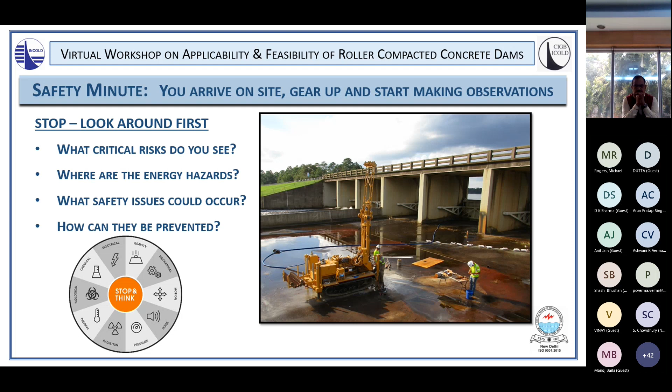So some of the quick things here are, we have a mobile equipment device here. And so it could have some energy moving back and forth, up and down. There's some gravity energy here on dropped objects from the boom that's above. There's some stored energy here, the water behind the radial gate. The heat is an energy source. Heat being out in the field, also ultraviolet radiation.

There's a lot of water here, and so slips, trips, and falls are very common in these areas, so be very careful. Just being outdoors, there are bites and stings that can happen, so we want to be careful with that. You can see posture here, bending over. So we want to be careful with that to not hurt our bodies. And then also the water hazards generally around the site here. So that's just a quick safety moment. And when we take a minute to be safe, then everyone goes home safe.

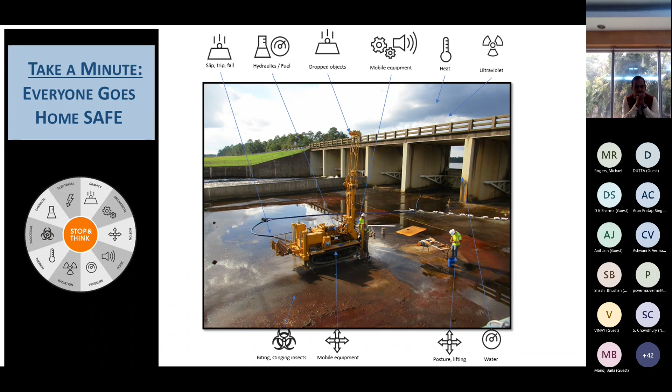So let's begin with roller compacted concrete and using RCC in dam construction. This presentation today will be part of ICOLD Bulletin 177, which I was part author of, and that includes other uses of RCC, stuff that may just be a little bit out of the ordinary. And so I'm going to talk about these topics today, from overtopping all the way through raising of concrete dams. These are primarily rehabilitation aspects of dams, but they can be used for new dams. And then I will present some case histories from the work that I've done and have been fortunate to be involved in.

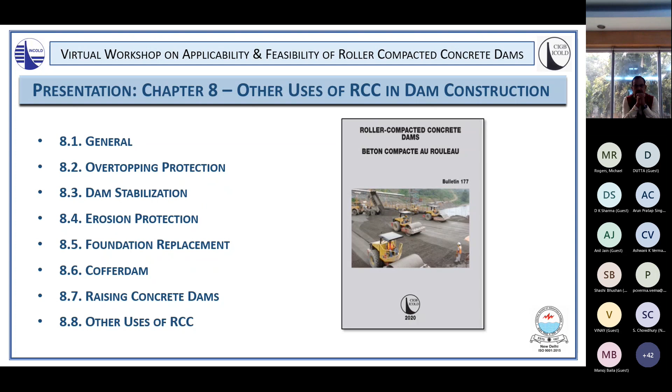Okay, so let's begin at the beginning. And Chapter 8.1 is just a general introduction to RCC for rehabilitation and dam raises. We know from the previous lessons and the previous chapters of the bulletin that RCC is a very adaptable approach to construction for concrete dams and appurtenant structures. This is based on site locations. Different sites have different adaptabilities to RCC and the success of RCC. And the RCC can adapt to these different locations.

It can adapt to different functions that we're looking for, whether we're trying to build a new dam or to rehabilitate an existing dam or raise an existing dam. And a lot of that is a function of the material availability. So the materials for the concrete, the rock for the aggregates, the cements, the fly ash, these are all very important considerations as we start to think about an RCC dam. We know that RCC offers the advantages for construction based on fast placement, getting a lot of material down and compacted very quickly.

And a big part of that is forming, or the lack of forms. As shown in this picture, we're looking at forms primarily on the upstream and downstream side to simplify the construction, and that allows us to go fast.

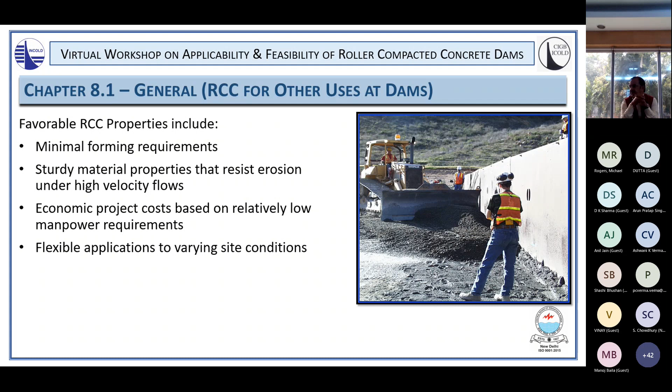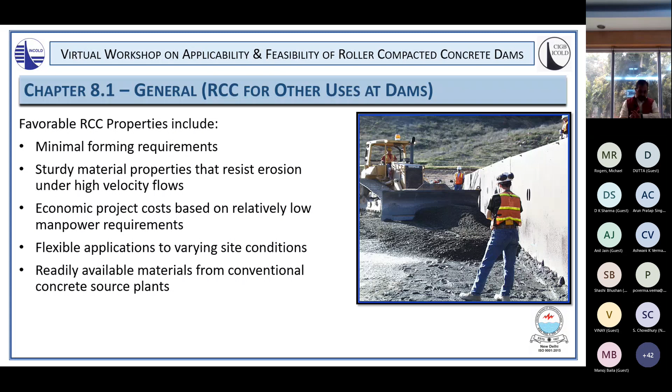Also being flexible to varying site conditions - as conditions change day to day, week to week, we need the materials to be adaptable to the structures and environment we're working on. We want to have materials readily available from conventional concrete source plants and from the area - the cements, fly ashes, rocks for aggregates, and sand for concrete. These are very important to have readily available from local sources.

As we look at rehabilitation, we take a step back and look at where this began. At least for me, this started in the mid 1980s when engineers started looking at roller compacted concrete as a methodology and approach for dam rehabilitation. My early career was all about dam rehabilitation.

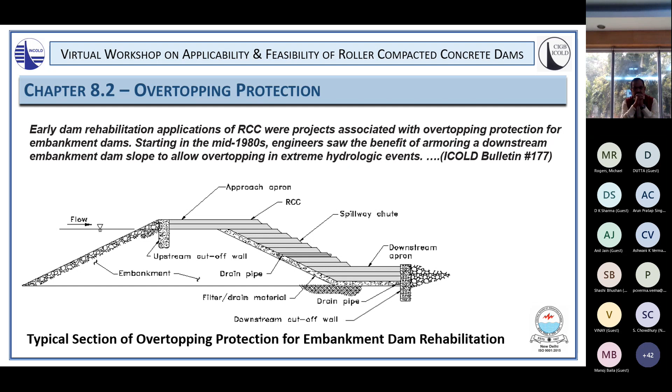But there are certain key aspects of this engineering we have to watch for. We need an upstream cutoff wall to prevent undermining and erosion on the upstream side. We need hydraulic control over the top of the dam, a good thickness that is stable and strong, an under-drainage system with a good filtered drain, and an apron with a downstream cutoff wall, again to prevent undermining and erosion under high velocity flows.

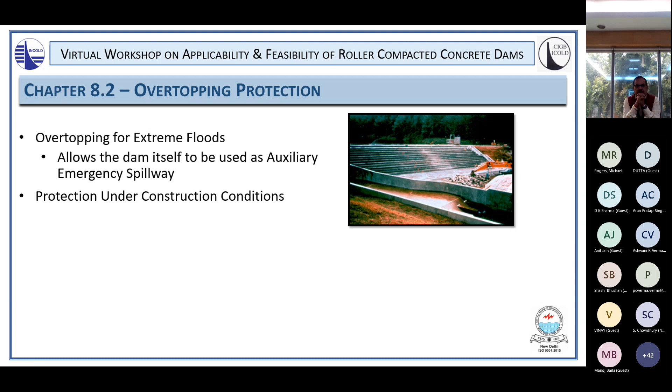The RCC as an overtopping protection allows the dam itself to be used as an auxiliary emergency spillway. This is a cool, very nice application of RCC - a very simple approach to using the material to create an auxiliary or emergency spillway on part of the dam. What we do is we have to be careful that we protect the dam under construction conditions.

When we're done, if the project is right, the RCC can even be covered for minimal environmental impact. This project shows a thin layer of soil and grass seeded over the top of the RCC, so when finished, it looked very much like before the rehabilitation happened. But should an overtopping event occur, the water will quickly wash out the overlying soil and grass and open up the emergency spillway for the RCC.

We know that RCC is adaptable as a hydraulic structure along the crest, and that crest can be modified depending on local conditions for a broad crested weir. Even a sharp crested weir or an ogee weir control can be added there. Most of the time, we don't want any type of gates controlling these emergency spillways; we want them to operate without manual intervention.

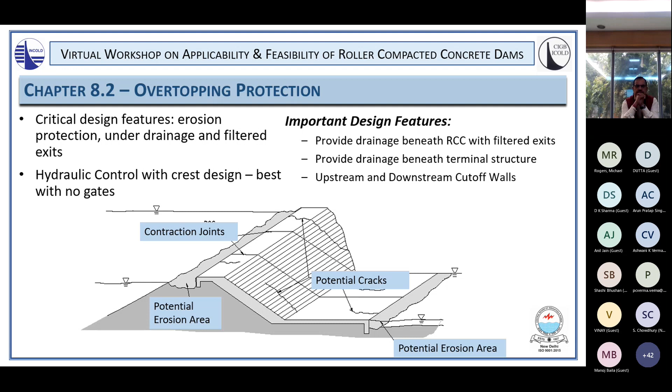Some critical design features I mentioned were the erosion protection at the upstream and downstream side to prevent scouring and undermining that could lead to destabilization of the RCC, an under-drainage system that collects water, prevents hydraulic uplift, and provides filtered exits, and a hydraulic control at the crest with no gates. The best projects I've seen have all used a broad crested weir, a simple control that allows the project to function as an emergency spillway. Important design features include drainage beneath the terminal structure, and the upstream and downstream cutoff walls.

Let's look at a case study. This is an older picture of overtopping protection on an embankment dam using RCC. In this case, the hydraulic control was an ogee type of weir control, and you can see the RCC on the downstream side and along the abutments, which protects the soft soils and erodible surfaces that would be exposed under overtopping conditions. From the size of the people here, you can get a sense of the scale of the structure.

This picture also shows the potential erosion areas where RCC has been put in to protect the stilling basin and the upstream area, and there's a cutoff wall underneath this weir that prevents erosion or scour from the upstream side. The steps themselves offer some energy dissipating function, as well as the stilling basin on the downstream side.

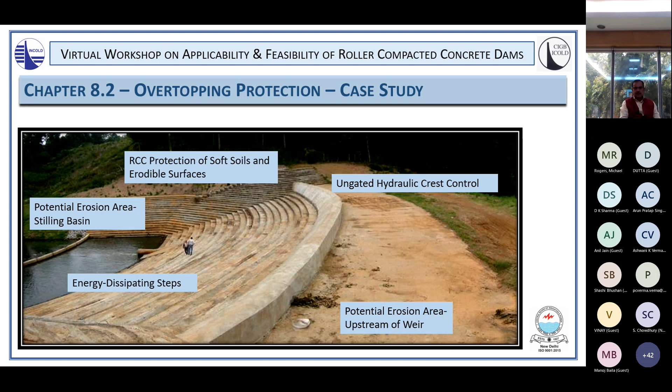And finally, the ungated approach for the hydraulic structure. This is a simple, elegant approach where manual control during a flood is not necessary, and overtopping happens over the ungated crest of the spillway.

Let's move on to the next topic, which is dam stabilization. I've had the fortune to work on a couple of these different projects. By stabilization, I mean structurally upgrading a concrete or masonry dam for either static or dynamic loading cases. We can use this approach for many older structures where design criteria have changed for static or dynamic cases, and the structures themselves are still in good shape but need some additional stabilization, some additional mass to stabilize the structure.

RCC has been used successfully to stabilize existing concrete dams by providing this additional mass, primarily at the downstream side of the existing dam because that's an easy, accessible place, or in the case of multiple buttress type dams or multiple arch dams, by infilling between these buttresses.

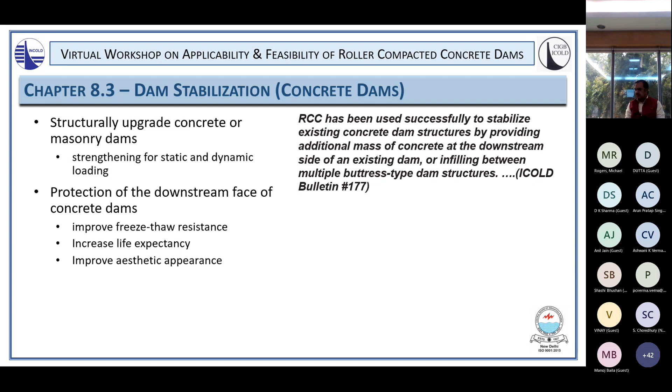Protecting the downstream face by placing RCC against it, in addition to providing structural upgrades, can also improve the freeze-thaw resistance of the existing structure by providing thicker concrete on the downstream face. The rehabilitation itself increases the life expectancy and generally improves the aesthetic appearance of the structure by giving it a newer look. So there are some different approaches for the stability.

One of the projects I was involved in used the buttress approach, shown in this picture, where the existing older dam needed additional stability. RCC was placed on the downstream side of the existing dam against the structure, providing additional mass on the downstream side and improving the stability to meet both the static and dynamic situation.

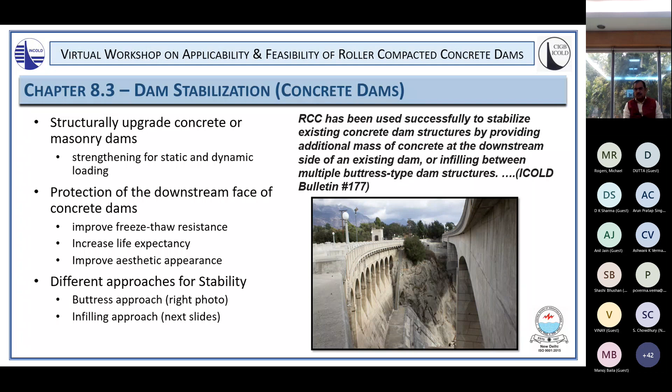Infilling between these hollow buttress type dams is also a possibility. This is an interesting case study in California — an Eastwood type dam, a multiple barrel arch dam I worked on that had dynamic stability problems, earthquake stability problems.

This is a close-up view of the area between these buttresses, as a base layer of conventional concrete was being placed before the RCC to smooth out and level the bottom of the buttress. You can see the concrete starting to come up. It's not going to go all the way to the upstream arch, but it will be in the middle here, enough to provide some stability.

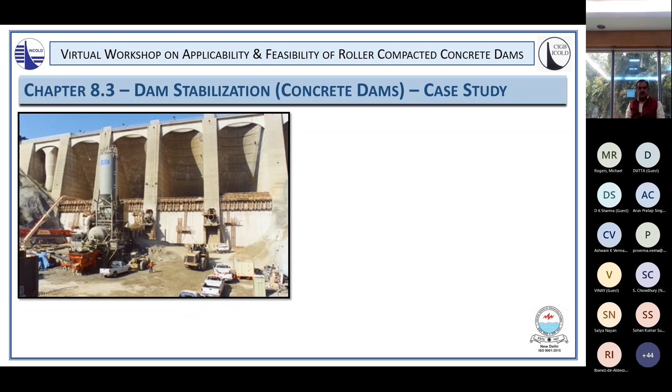This is further along in construction — you can see the RCC starting to come up. And this is a picture of the completed structure.

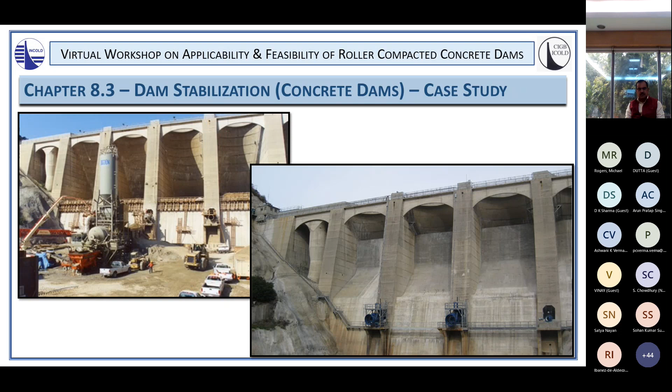We designed this to leave the appearance of the multiple buttresses on the downstream side. We put in just enough infilling of concrete to stabilize the dam, but left the general appearance to keep the character of the dam intact. These buttresses are hollow and include the outlet works as part of the dam.

Moving on to chapter 8.4. This is the erosion protection part of RCC, where we use RCC for protecting areas subject to aggressive flowing water, areas like spillway chutes or channel linings, stilling basins.

Other applications include spillway aprons, upstream freeboard wave protection, barrier separation dikes, and plunge pool shaping. It's been used in plunge pools that have erosion problems to provide additional erosion resistance.

Some key design considerations for RCC in this application are durability. You want to look at a mix design or application that provides good erosion resistance to high velocity flows, and consider the long-term performance of the materials.

In some cases, energy dissipation is important, or deflection or reflection of the water away from structures. That can sometimes create energy concerns, and we want to be sure we don't cause any distress to the structure.

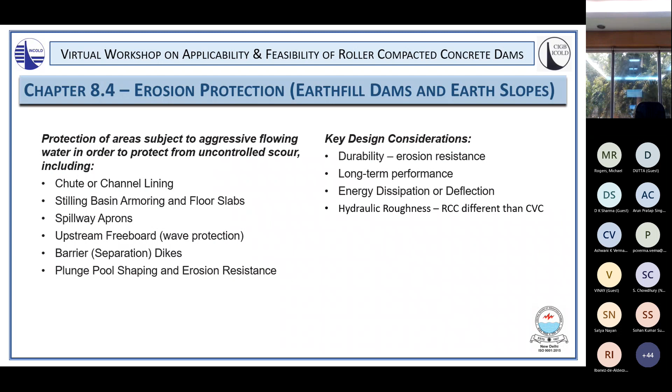And finally, in channels or even spillways, hydraulic roughness can sometimes be a consideration, the Manning's N. I bring this up to recognize that RCC can have a different Manning's N roughness than conventionally vibrated concrete.

So let's look at an example. Platanovryssi Dam in Greece is a good example of this, provided by Malcolm Dunstan and Associates. This is a 95-meter high, 305-meter long RCC dam. The structure itself is a good application and a good project for RCC.

But what I wanted to show in this example is the downstream training wall, this channel wall developed using RCC to prevent scour and erosion along the wall as the spillway operates under high velocity flows. The designers here were using RCC for both the dam and the downstream wall.

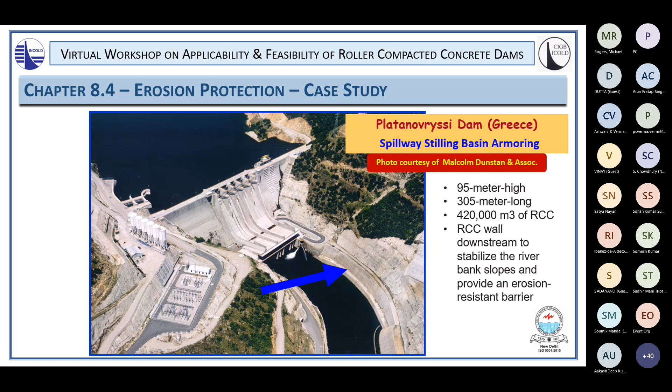I've seen that approach also used on upstream walls. In some cases where there's a high velocity flow or unstable valley walls upstream of the dam, RCC can be used as slope protection to stabilize those slopes.

And then there's general slope protection for erosion. I'm going to talk about the case study of Oroville Dam that I was involved in.

This is the emergency or auxiliary spillway portion. In the picture here, you can see on the left side the weir of the auxiliary spillway and the erosion that happened after this spillway was used for the very first time.

The project was more than 50 years old and had never used this auxiliary spillway. The first time it was used, it created a high degree of erosion, and this large eroding area near the bottom of the weir was a head-cutting situation moving upstream, causing considerable concern and eventual evacuation of more than 200,000 people because it appeared to be endangering the stability of the dam.

As an engineer involved in this, we came up with a solution using RCC that put RCC over this entire area downstream of the weir and created a splash apron for protection. I want to tell you a little bit about that design and what went into it.

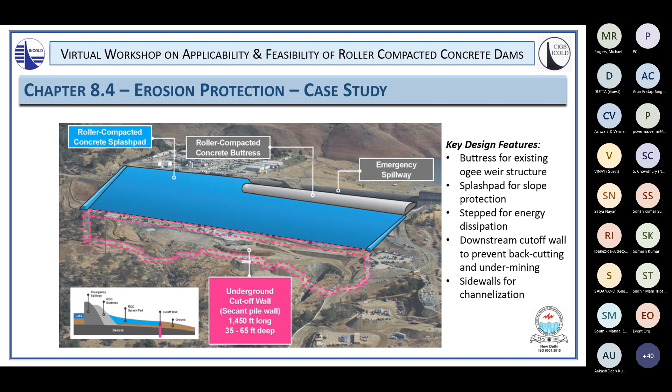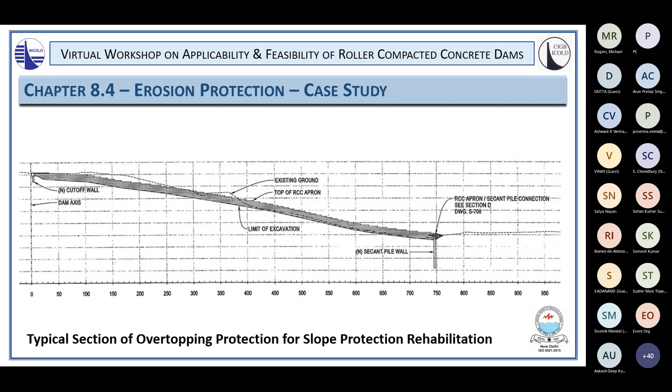This is a simple cross section showing the upstream weir area, with an upstream cutoff wall using the same principles as embankment dam overtoppings. The horizontally placed RCC gives a minimal thickness of about 3 meters, and then the downstream secant pile wall was buried deep into the rock to create a good solid downstream cutoff, preventing erosion in the unprotected areas downstream of the RCC apron from moving upstream and endangering the structure, as happened in the original flooding event.

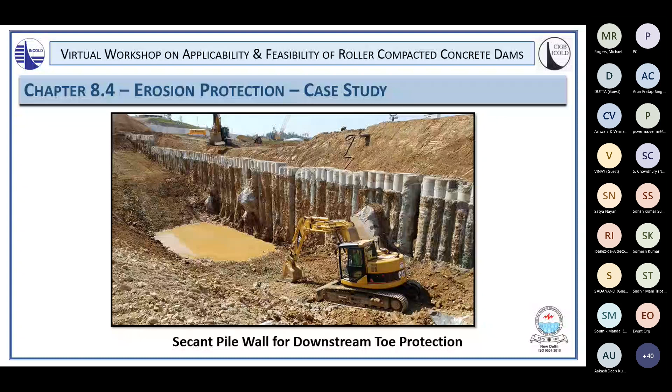These are some construction photos showing the secant pile wall for the downstream toe protection, after the secant piles have been installed and excavated. What we're looking at here is the RCC pad on the left side, and downstream on the right. Now the secant pile wall has been upgraded, and a grade beam has been put over the top of those piles. RCC has been put on the downstream side of the wall to create additional protection against undermining.

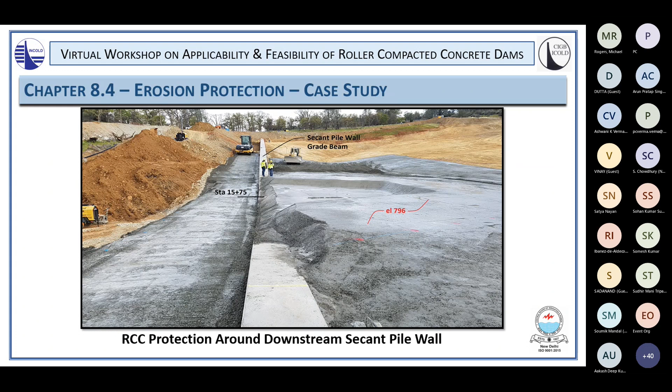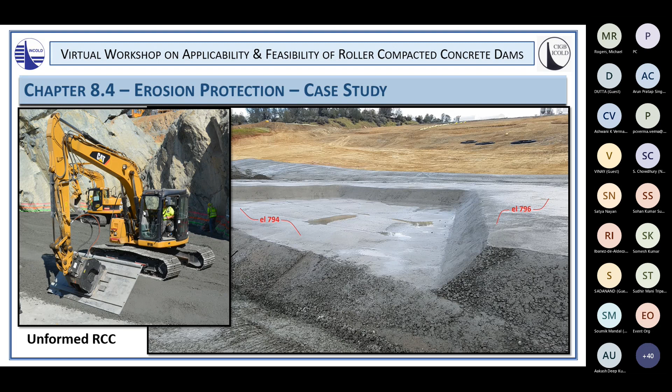Now we're just starting to build the RCC horizontal lifts of the splash pad, moving upstream. We're starting from the lowest point here, moving upstream in two RCC lifts, each 30 centimeters, moving upstream. This one-to-one slope is an unformed slope, and the contractor was able to get compaction along that slope using a special machine with a vibrating plate to create that slope.

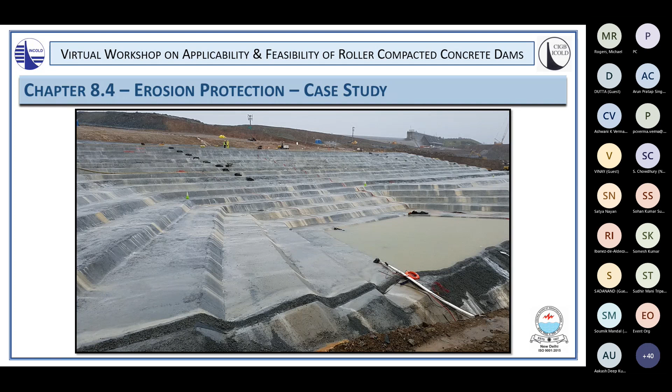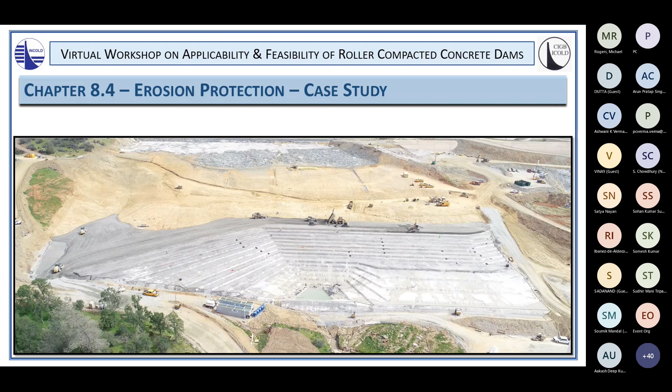This is an interesting picture, about the same time as the last one, showing the progress. This is about half of the RCC—this project was done in two halves, so this is about half of the splash pad, and the wall is just starting to be built on the left side. As it moves up, you can see it's protecting the brown area, which is completely weathered. It was probably moderately weathered rock, so it was friable and highly erodible. Up at the top, the grayer rock was more fresh to slightly weathered, mostly non-erodible. There were some holes where wider areas of consolidation concrete were put in, and the RCC is just moving up the slope to fill.

This is near the end, showing the original weir of the emergency spillway structure. The RCC has come all the way to the top, and you can see by the different angles that have been adapted that the changing geometry—the RCC allowed us to change the geometry to maintain the thickness—and we still have the steps. The water here is just curing water, but it proved to be very adaptable. You can see the closer spaced steps against the weir are the steps of the buttress, and we have the same steps coming all the way to the top.

For this project, we actually used rebar to tie these two structures together. We drilled and grouted rebar into the existing structure and extended it about 2 meters into the RCC, putting a flat plate at the end. That's how we were able to tie these two structures together with the use of rebar into both structures.

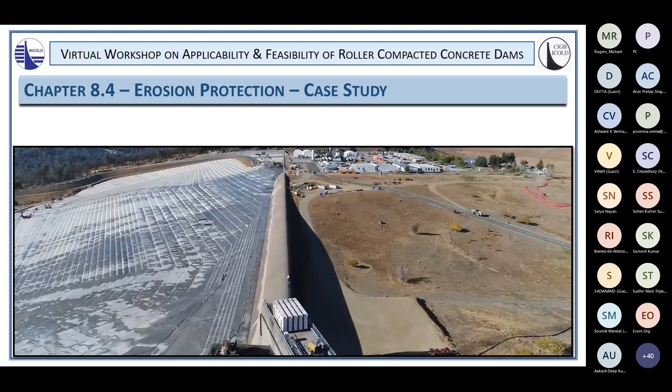So let's move on to using RCC as a foundation replacement. It's especially important that the foundations of hydraulic structures, including dams, are shaped in a proper manner to avoid sharp offsets that could result in stress concentrations. We know this from our basics of creating foundations that are smoothly varying so we don't have those stress concentrations. RCC is a good material to create these smoothly varying foundations, and it can be used for RCC dams as well as other types of structures to fill in cavities in the dam foundations and at the downstream toe of spillways.

The RCC can be used in the stilling basins for spillways. It provides a good material, highly resistant to high velocity flows, and can also be used as foundation for dams and other conventional concrete structures, including spillways, powerhouses, and valve houses. I'm going to give you some examples of that in this presentation.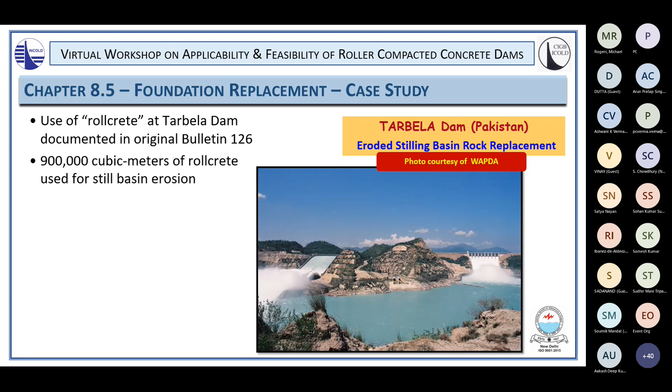So we go back to one of the early uses of what has come to be known as RCC. It started as rollcrete at Tarbela Dam back in the 70s. This is documented in the original ICOLD Bulletin 126, so you can look back there and take a look at that. This was about 900,000 cubic meters of rollcrete that was used after the initial operations of this large spillway started to cause unexpected erosion. The RCC was used in the stilling basin to create an armored pool, if you will, to resist the erosion, and it worked very well. It was a very nice application, one of the initial applications of rolled concrete.

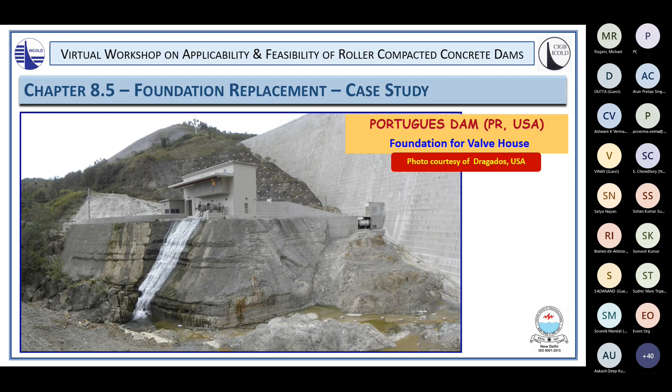This application is a really cool one. This was an RCC dam, Portugues, down in Puerto Rico, and the dam itself was RCC, but as part of the construction, the engineers designed a foundation for the valve house. You can see the rock down at the bottom, and they needed a valve house up higher, so an unformed RCC slope was used with compacted lifts, bringing up a very nice pad to set the valve house structure on. A very nice application of RCC, and it allowed the pipes to be brought through the structure, through the RCC, and into this. Also, when these valves operate, there's good resistance to erosion because of the RCC on the downstream side. In the background, you can see a very nice, good looking RCC structure itself for the dam.

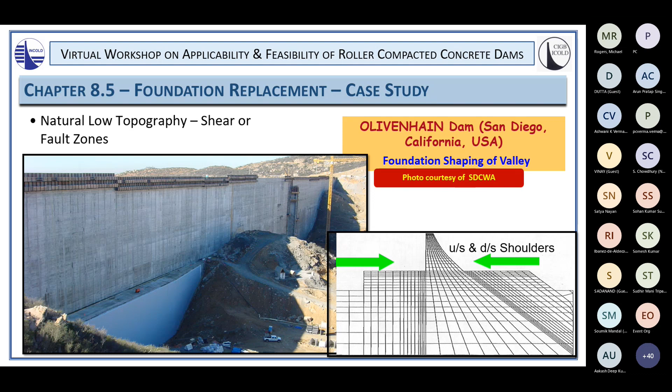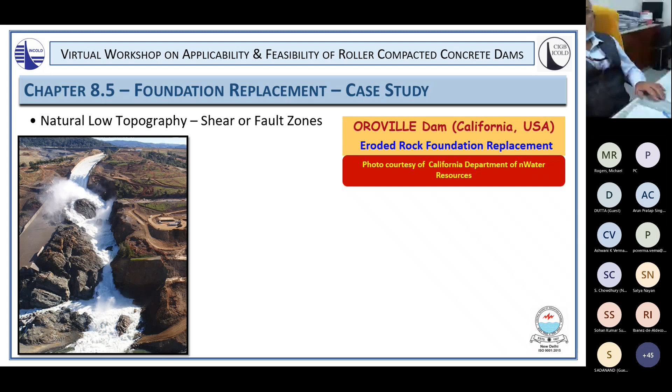As background, this happened in February. This picture was late February 2017, and the designers knew that once the rehabilitation started, the spillway would have to be rebuilt and operational by the following November, just 9 months away. The work would not be able to start until May, so really there would only be about 6 or 7 months of construction time. The design using RCC made a lot of sense because of the speed and adaptability of the RCC.

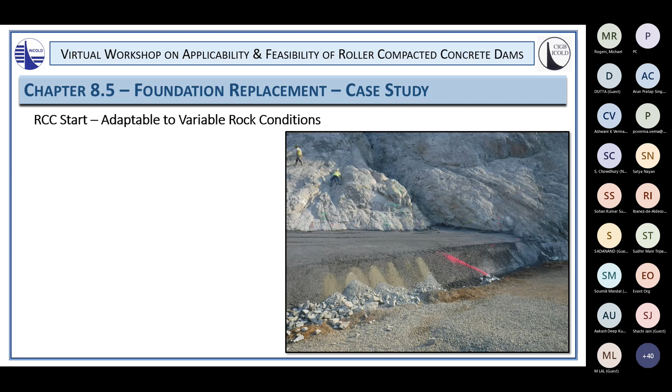But you can see how adaptable the RCC is to these varying rock conditions. It's in and out these different slopes of the rock, and the RCC just fits very nicely in here, and the whole idea was to create a nice base foundation for the new spillway. And we used that same plate.

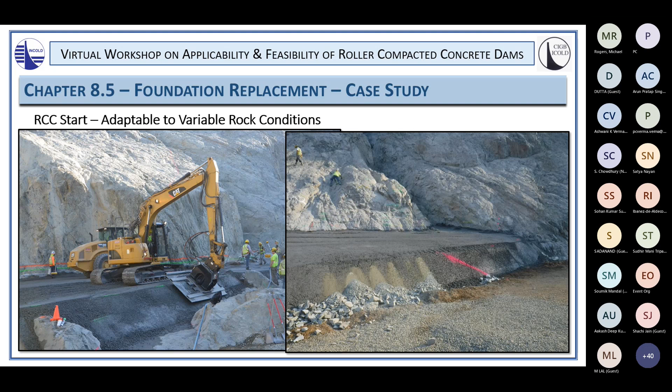So these slopes coming up, this is a 1-to-1 45-degree slope coming up. You can see the markers on the rock for the 30-centimeter lifts of RCC coming up. And we're just moving up and moving the RCC in and around this tremendously challenging foundation of rock, and bringing the RCC material up to rebuild the spillway.

And so once we came up out of the eroded hole of the foundation, then we were on the main spillway. And this is early on, probably in June, where we were up to the spillway level, and we're creating a sloped RCC chute to match up with the conventional concrete that was being built further downstream.

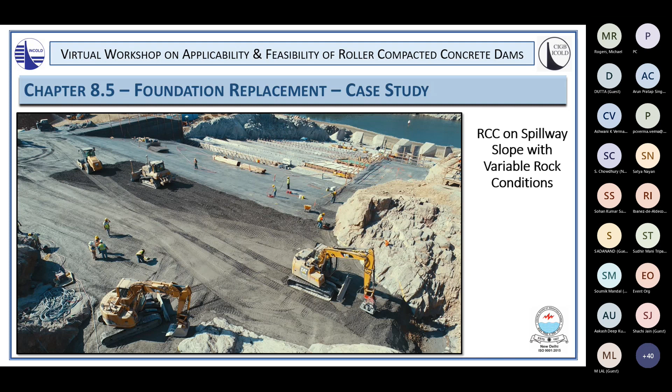And then RCC was also being used for these walls, these vertical walls, which was very innovative, I thought. But you can see the adaptability of the RCC in and around the rock foundations, left and right, up and down, coming up and being placed very, very quickly.

This is a different angle, a little bit later in the project. The RCC has come up a little bit further, and RCC is being built into the main scour hole from the service spillway. You can see the rock has been nicely cleaned off. The RCC itself is a wide area here, then comes up to a very narrow spillway chute, and you can see the general geometry of these walls as they are coming up along the sides of the slope.

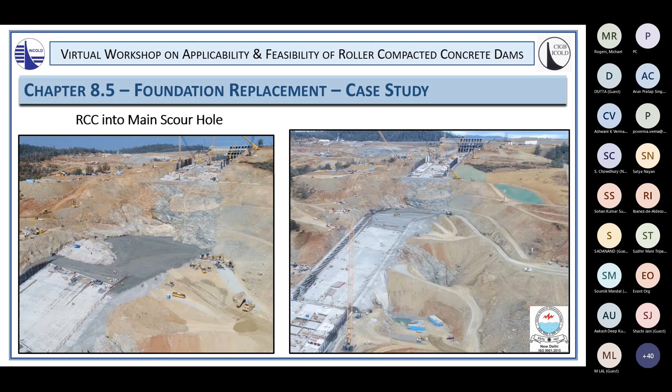A little bit further along the way, the spillway chute is coming up 30 centimeters at a time, and it's coming up to match on top the upper portion of the chute, which was already on solid rock. They are rebuilding that chute and those walls with conventional concrete. So the RCC is rising to meet that concrete spillway.

This is that same picture from before, but you can see that vibrating plate being used to smooth the RCC and compact it to get the strength it needs on that 4:1 rough graded slope.

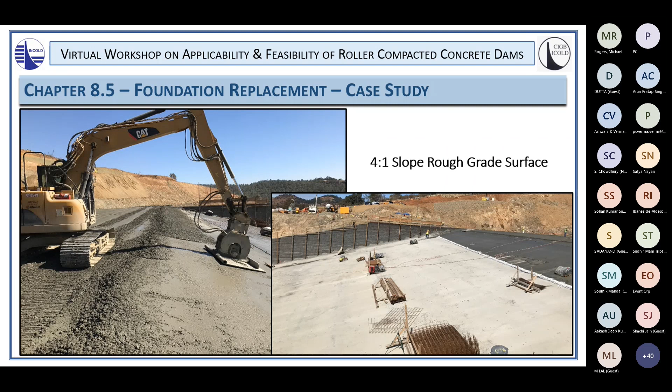This is showing the areas that had completed the curing. The dark areas to the right are water curing that's still going on. But after a certain amount of time, that curing wasn't needed anymore, and the sandbags were added to take care of the water. And in the background, you can see the wall with the steel baskets that were created being used to create the walls that eventually had shotcrete over the side to create nice walls.

So let's move to section chapter 8.6 on cofferdams. RCC is very adaptable and has been used innovatively for river cofferdams. This provides a particular advantage of rapid construction, building a cofferdam structure very quickly when the river flows are low, and the materials are typically already specified for the dam. So if you're building an RCC dam and you need a cofferdam, the RCC can be used for the cofferdam.

And the advantage there is it's more stable than a conventional dumped fill cofferdam. It's more impervious, so there's a lot more engineering and control with that type of structure, and it can take overtopping. Large floods can overtop an RCC cofferdam, and then when the floods are over, you can come back, clean out the construction area, and the cofferdam is still intact.

So the advantages of the RCC cofferdams are they're strongly stable, they're durable in overtopping events, and they can be built very quickly. The disadvantages are they are more expensive because there's cement involved, and they can be difficult to remove. Sometimes they need blasting even to remove.

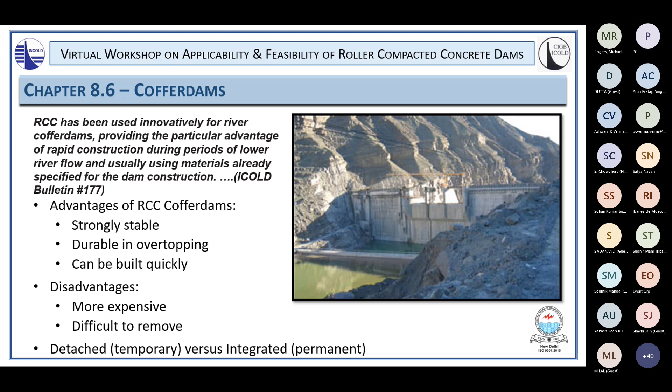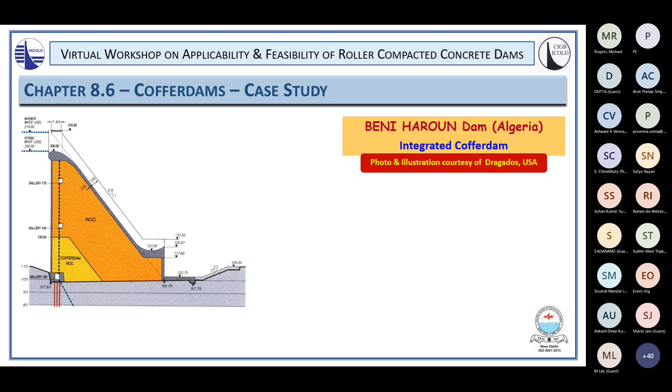Well, on this structure, this is the Beni Haroun project in Algeria. Thanks to Dragados and Malcolm Dunstan for sharing this case history. This is the integrated cofferdam, where the cofferdam was built first and then the RCC was built over the top of it, almost as a dam raise. But this allowed the materials and the effort that went into building the cofferdam also to be used for the main dam. So this was a really neat and innovative design for using RCC both for a cofferdam and an RCC dam.

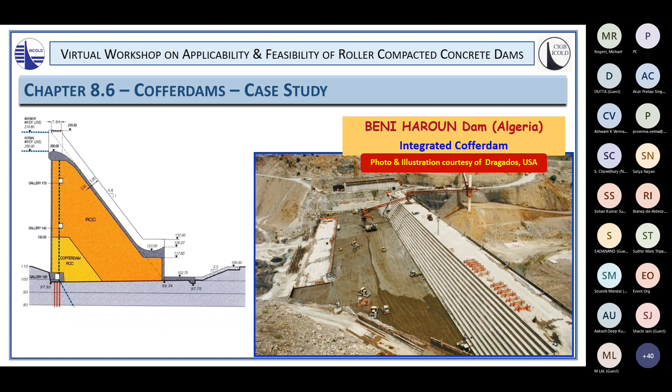This shows the project under construction. The structure itself on the right side is actually a cofferdam as part of the structure. And so now it has gotten to the point where they are now placing RCC downstream of that cofferdam and tying it into the cofferdam itself here.

In China, they had a very interesting application of RCC for the cofferdam at the Three Gorges Dam. And this picture shows the cofferdam upstream of the dam. And this provided a dry area downstream. And then when they were done, they had gates here, and they flooded the area between the cofferdam and the main dam, and then portions of the cofferdam were removed using explosives. And this was all part of the design, and it worked beautifully and provided good protection for the construction work for several years during the construction of the main dam until the dam itself was ready to function as the cofferdam.

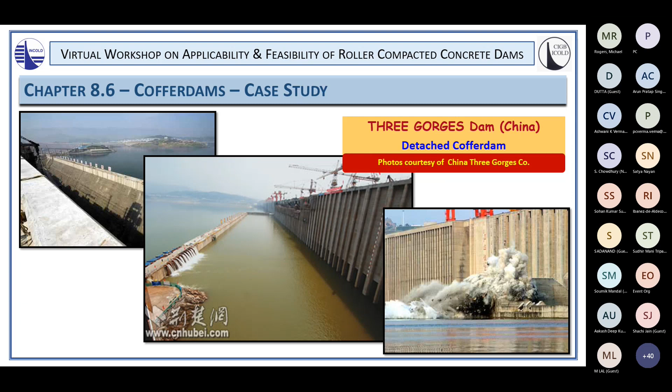So let's move on to raising of concrete dams. Raising existing concrete gravity dams is a specialized application of RCC. It combines RCC buttressing and erosion protection and other aspects of RCC to create a composite structure, this composite structure of the existing mass concrete dam and the raised concrete dam using RCC. So it's an economical method of adding storage with relatively minimal additional costs to an existing dam.

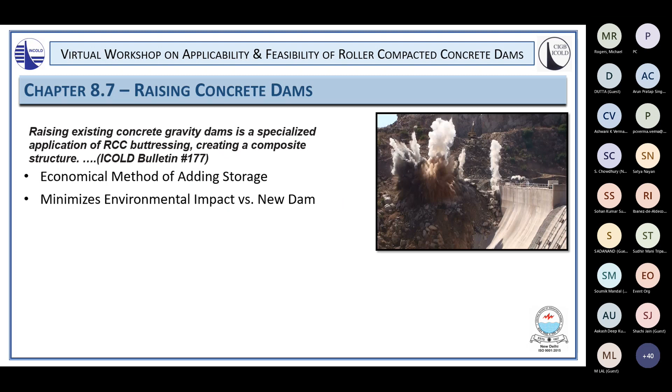Large increments of storage can be added because you're at the top of the storage pool where there's a lot of additional storage available for every meter going up. It minimizes the environmental impacts versus building a new dam. So the owners and the projects typically have already realized most of the environmental impacts of the dam itself, and by raising it, the environmental impacts are much less than for building a new dam.

So some key design considerations. Starting with the foundation, you're going to have to be excavating and blasting adjacent to existing structures, not only regular structures, but dam structures. And so you want to be sure that the engineering is solid going into that. This picture shown here is from one of my projects that I worked on, where there was some initial blasting going on, and this was a very controlled blasting immediately downstream of the existing dam.

The composite structure lends itself to a specialized analysis of the original mass concrete plus the new RCC overlay. And there's structural stresses and thermal stresses that go into that. I'm going to touch on that in a few minutes. And the important thing is to get a good integral connection between the two structures. And so the preparation and the treatment of that interface, where the two structures, the old and the new, connect, is very important.

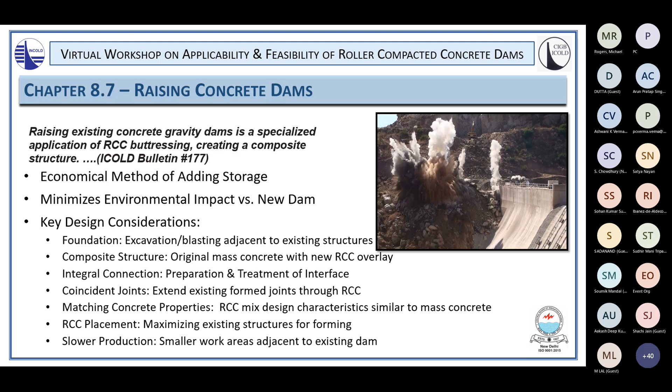And I found that placing RCC for the raised dam is significantly slower than a new RCC dam because the work areas are just not as big, and you can't work with large volumes.

Now there was some reservoir drawdown necessary to reduce the stresses on the existing dam and to provide work areas on the upstream areas of the dam. But enough water was maintained in the reservoir to allow the structure and the reservoir to continue to have operations during construction.

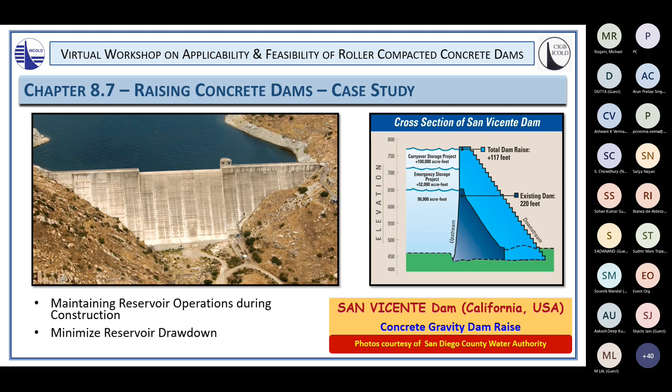This was a picture, downstream view of the original dam. You can see that original outlet tower about in the middle of the picture. And then generally the layout of the structure and the reservoir. So this was a water supply reservoir. The existing dam was 67 meters high, completed in 1943. So it, at the time of construction, was about a 60-year-old dam. And it was a conventional concrete gravity dam, about 239,000 cubic meters.

So the raised dam, we were raising 35.7 meters to an ultimate height of 102.7 meters using an RCC volume of a little bit less than 500,000 cubic meters. We were adding a new outlet tower and tunnel, and this was part of the consideration because we needed that existing structure to maintain operation during construction, but we wanted to build a new outlet tower, and so that was built separate from the original tower, and then the original tower was decommissioned when the new tower was ready to go.

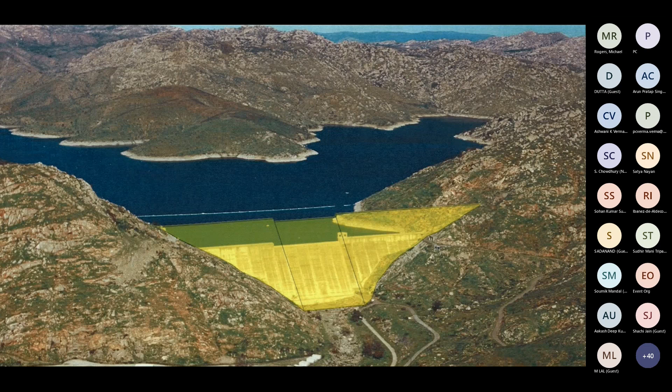So step one was to understand the existing dam material properties. So we did some large diameter cores, some 40 centimeter coring through the dam, and we picked up these large samples, and we did some testing at the U.S. Bureau of Reclamation, large testing machine in compression and tension.

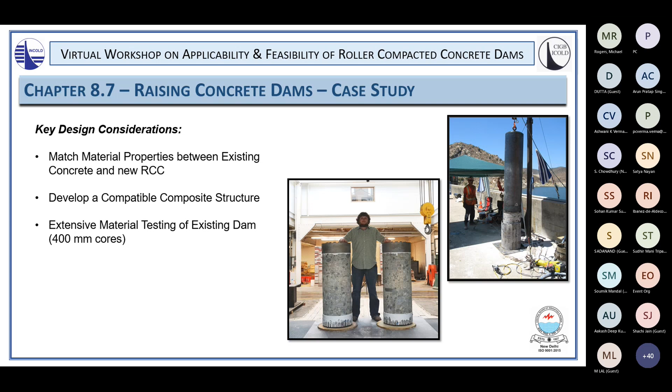The idea was to develop a compatible composite structure so that we understood the strength of the material in the existing dam so that we could design an RCC mix that matched that. These 400 millimeter or 40 centimeter cores were taken out of the crest of the existing dam and then sent for testing at the Bureau of Reclamation.

One of the key aspects of a dam raise is water tightness. The existing dams will typically have an existing system of seepage control, typically involving water stops and internal formed drains. Now for RCC, we want to keep it simple. And so for this project, we eliminated internal drains, we eliminated water stops, and we put the drainage and the impervious barrier on the outside of the dam using a Carpi exposed geomembrane liner. And this provided water tightness for the raised portion of the dam.

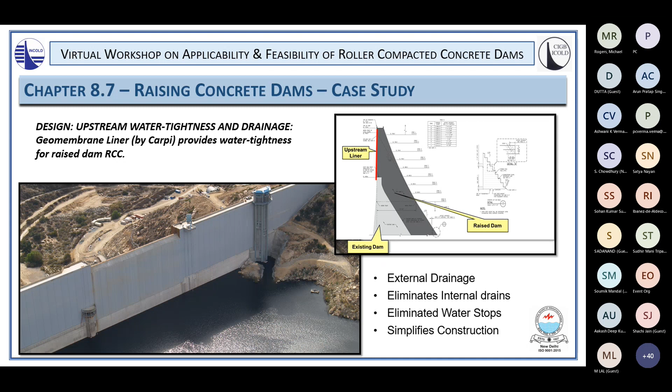This photo also shows the relationship between the original outlet tower on the left and then the new outlet tower that had multi-levels and also fish screens that were able to be lowered over those openings. And so this was the completed dam. The new low-level outlet was controlled in the middle here by a new gate, which is submerged in this drawing.

The interface between the existing concrete and the new RCC is important. We know existing dams have a thin layer of weathering on the concrete that has been exposed to freeze thaw and other weather influences, even solar radiation. This weakened the material in a thin layer, a few centimeters or so, over the history of the dam, so we want to remove it.

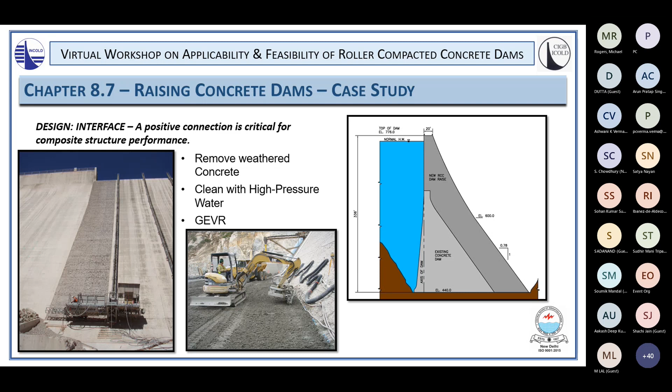As RCC is getting ready to be placed, that slope is cleaned with high pressure water, and grout-enriched vibratable RCC, an enrichment of RCC, is placed against that slope and vibrated with immersion vibrators. You can see that in the middle photo, creating a good, strong bond between the original concrete of the dam and the new RCC, to create a strong composite structure.

An important part of the design is looking at the thermal effects, because we're putting a large amount of concrete on the downstream side of an existing concrete structure, and that new concrete will have a heat of hydration that will impact that joint and impart stresses on the structure, especially at that interface. So we want to look at that as part of our thermal studies in the design phase.

Part of that is looking at the RCC placement rate. How fast the RCC is being placed on the downstream side will tell you what that heat gain is and what the incremental loading is on the downstream face of the dam.

Another factor is the ambient air temperature. The RCC is placed over a period of months, and the ambient air is going to change, which will impact the peak stress and the peak heat temperatures inside the RCC, which then impacts the stresses. The adiabatic temperature rise of the cement itself inside the RCC, and these all lead to the RCC placing temperature. So you can control some of these stresses by specifying lower placing temperatures if you don't want the ultimate temperature rise to be too high.

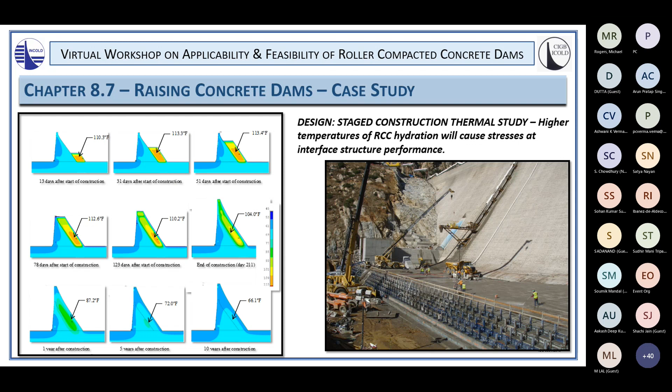The photo on the right shows one of these initial stages of the RCC placement at San Vicente, some of the initial forming and the RCC placement equipment. In the background, you can see the new low-level outlet that was put through the dam, through a tunnel that was bored through the dam.

In addition to the thermal effects, there's also structural static loading of the dam. That can be investigated through incremental superpositioning of these loads to the structure. What we're looking for ultimately is what are the stresses at that interface.

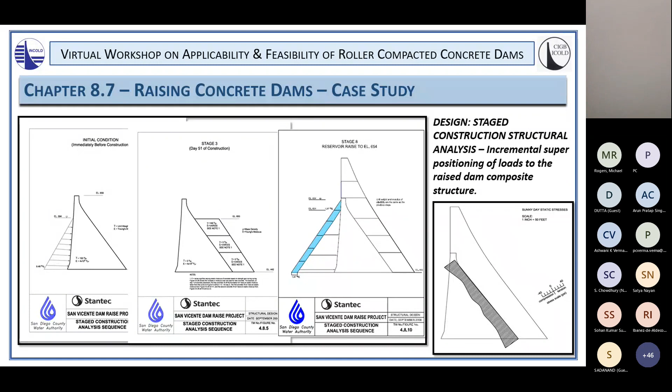RCC placement rate has a lot to do with the economy of the project, as mentioned earlier, the thermal stresses on the project, and the overall constructability. So understanding what the RCC placement rates are is very important.

Then it opens up a bit at the top of the existing dam when all of a sudden you're going to be very wide again, so your placing rates get bigger. But as you get near the crest of the dam, where the width of the crest gets to be less than 9 meters, then the placement rate gets very small.

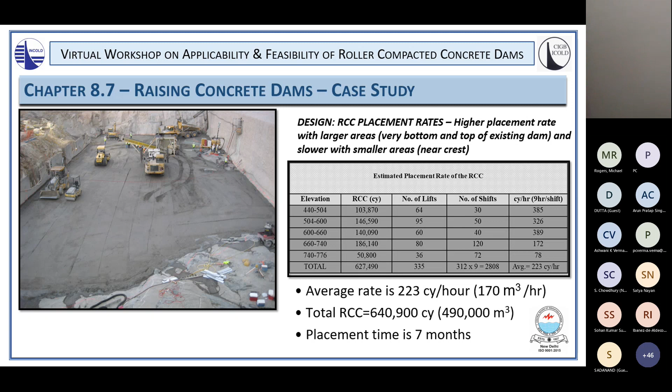So it's an important part of engineering that goes into the design to understand what the RCC placement rates are. For this case study, this is the completed project.

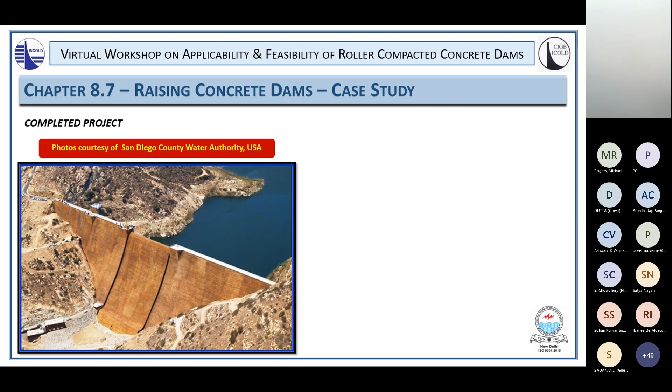That brown stain fades over time, and eventually the dam blends into the surrounding areas. If that stain wasn't there, you can see the white of the crest of the dam—the entire structure would be that bright.

I have one more case study for you as I'm getting close to wrapping up the presentation. This is just a very brief project that's in the design phase right now. This is the Gross Dam in Colorado.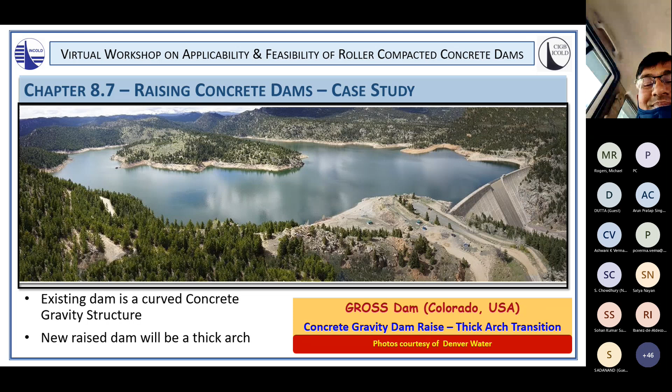We developed an approach to change and transition this concrete gravity dam into a thick arch dam. On the picture on the right, the gray cross section shows a typical gravity dam with the existing slope of the existing dam of 0.662 horizontal to 1 vertical.

So that if we were going to raise it strictly as a gravity dam, that would be the flatter slope of the downstream face. But by going to a thick arch and taking advantage of the arching action of the dam, we are actually able to steepen the downstream side from 0.662 to 1, to 0.5 to 1.

This allowed us to save all of this material between the red line and the outside blue line. So you can see the amount of RCC that is not necessary and can be saved, creating a significant cost savings for the project and for construction.

The picture on the left shows that the center red portion of the dam is the main portion of that thick arch—that's the steeper slope. Then we had tangential thrust blocks. We designed this as an arch dam, where these thrust blocks are tangential to the curvature of the dam in plan, and that takes the thrust of the arch and brings it to the abutments on either side.

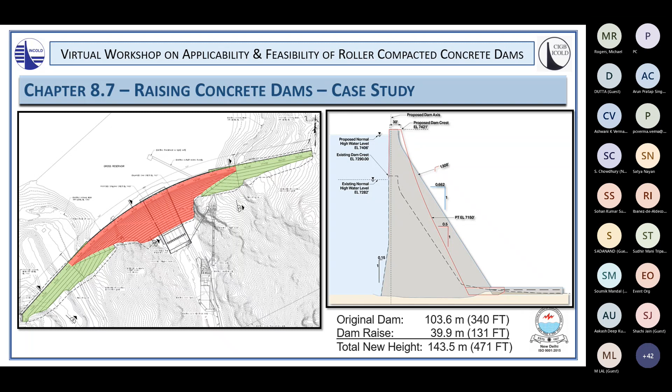The main spillway that was in the original dam, in the middle, was kept nearly the same geometry in the raised dam—a very similar approach to what we had at San Vicente.

So just some simple graphics of the project. This was the picture of the original dam, and you can tell that we don't have the abutments here. And that's why those new tangential thrust blocks were added.

The arching action works very well in the lower valley, but where the valley goes away and flattens out, we needed to add those thrust blocks that were shown in the previous slide.

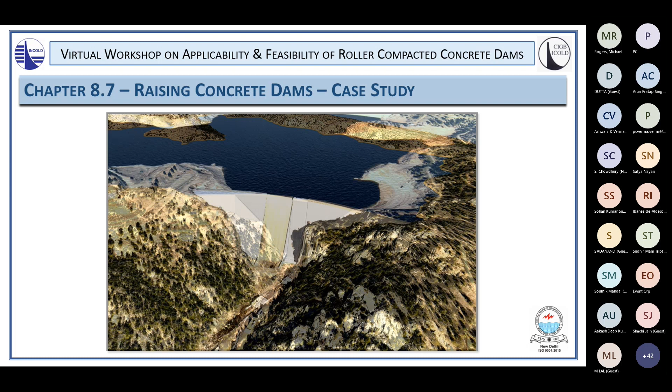And so then the raised dam would look like this. Again, this is still in design. Construction has not started yet, but this is the artist rendering of what the structure will look like with the main dam, the thick arch in the middle with the ungated spillway, and then these thrust blocks on the left and right abutments that bring the structural loads to either side of the structure.

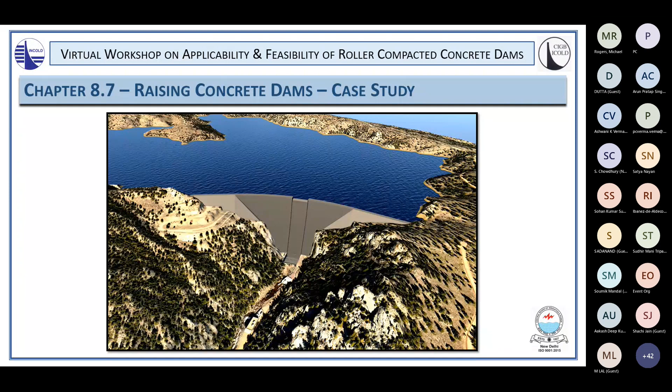So the last section of chapter 8 in Bulletin 177 is other uses, and this is just a catch-all of different aspects of RCC. It's really just meant to say that there are many other innovative applications of RCC possible through the creative mind of engineers continuing to find new opportunities in the technology. I've shown you some of those in this presentation, and I have two more to show you.

And these both come from the example, the case study of Oroville Dam. Oroville provided the opportunities to do some of this innovation because it was an emergency. It had some very strict schedule constraints on it, and we used the RCC to the best extent that we could.

One of the things we needed in the spillway was vertical walls for the spillway on a sloping surface that was sloping up the hill. And so we developed this innovative use of Hilfiker wall baskets, like a reinforced earth type approach, but for concrete.

These baskets allowed us to form vertical faces as we went through here. And we had these outside slopes, this 1-to-1 45-degree slope on the outside. That was typical of that hole we were filling, that was eroded by the original accident. And then as we got to the chute surface, we formed this rectangular cross section for the spillway chute. We would eventually come back and add a high strength layer of RCC over the top of the base layer of RCC.

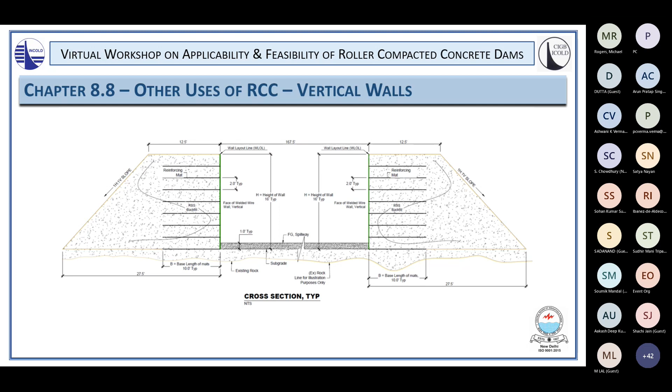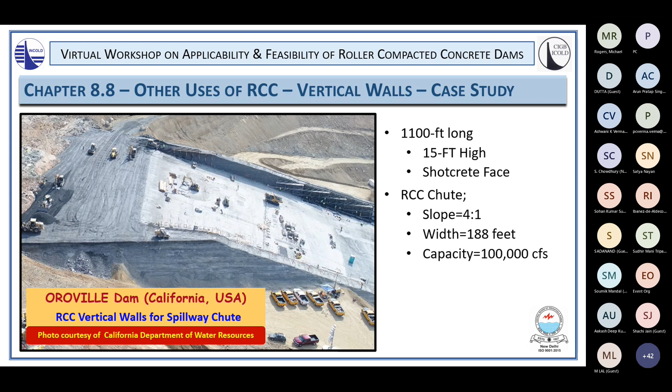This picture also shows some of the work that was being done. The scaffolding has been added by the shotcrete contractor to allow its workers to get in and spray shotcrete on the inside of the wall and smooth it as we were going up. You can see the amount of materials. This is a good example of the benefits of RCC: not a lot of equipment on the surface, not a lot of workers, but the RCC is going in very, very quickly.

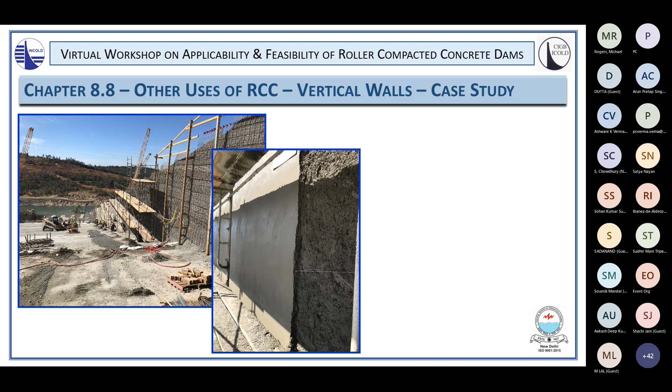This is those walls I was mentioning. The left picture shows the outside of the baskets. Some reinforcing was added there and dowels to strengthen that. Then the shotcrete was applied and smoothed, and you can see what a very nice smooth surface we have. It was designed so that when the spillway was finished in November of that first year, if necessary, water could be put down at high velocity down this spillway with a high strength RCC overlay on the chute, and then these shotcrete walls.

So I mentioned the overlay. The RCC, as we were coming up, we were smoothing it with that vibrating plate and creating a rough grade on the 4-to-1 slope. We came back and some of the material was a little loose, so you can see some of it was carved out. Then we put a higher strength RCC, with a mix design that developed its strength over 28 days, reaching design strength, but placed like RCC. This is a 4-to-1 slope.

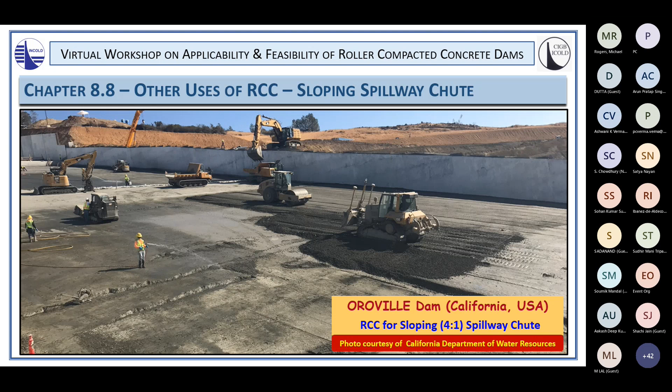We couldn't get dump trucks onto the surface, so the RCC was dumped above the walls and transferred using backhoes onto special dump trucks with track-mounted rigs on the spillway chute. They were moved around on the chute and dumped. This was usual RCC placement using rollers and dozers, and then smoothing was done by that same vibrating plate, used like a trowel, to smoothly finish the RCC and give us the compaction we needed and a nice smooth surface.

You can see the finished surface here to the right, with some of the dowels sticking up. The shotcrete walls on the outside are very nice. It has a curing compound that gives it a white look, but it turned out to be very nice as a spillway chute.

This is the completed spillway chute, finished at the end of October 2017. Once the upper and lower portions of the conventional concrete were done, the RCC was finished at the same time, and the spillway was available for discharges if there was another flood that year. This is all RCC here, the spillway chute itself and the walls. I thought it was a very good application of RCC, and this was all done in less than six months of RCC placement, so I was very excited about that.

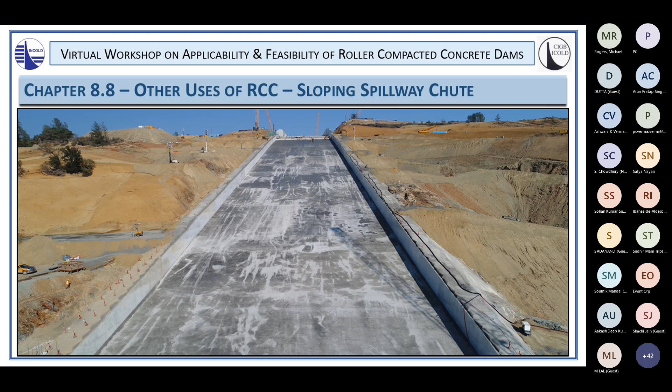I hope that with all of these case studies and applications in this chapter of Bulletin 177, I've been able to give you an overview of the many advantages of RCC and other applications beyond just building a dam. There are good applications out there, and as engineers, you should challenge yourselves for these types of applications.

I'll leave you with the statement from Bulletin 177: the use of RCC for the rehabilitation of existing structures and construction of new concrete dams, including dam raises, continues to expand as we, as engineers, utilize the many efficiencies of this material and placement methodologies to benefit project economy and schedule. So I encourage you to be creative.

The other aspects of RCC presented in other sessions and parts of Bulletin 177 give you the basic building blocks of RCC material design and constructability. This chapter, I think, shows some of the different rehabilitation and dam raise applications of RCC, and they work. I have worked on them, and it's an amazing material. I encourage you in the projects you have in India—I know there will be many uses for this important material and placement method.

Yeah, Mr. Anil Jain, would you like to ask? Thank you, Rogers sir, for your nice presentation. Earlier I also had the opportunity to listen to you on Oroville Dam, so I have some questions on that. I noticed there were large scour holes on eroded rocks—did you fill all those holes with RCC? There must have been some equipment constraints. Wherever it was not possible, how did you manage it? Did you go for CVC or something else?

Second question—you used RCC for a splash pad also. What kind of velocity were you expecting there, and in your opinion, what velocity can RCC sustain against erosion? What was the proportion of cementitious material used for the splash pad? Okay, first you reply, then there is one more question, but that is different.

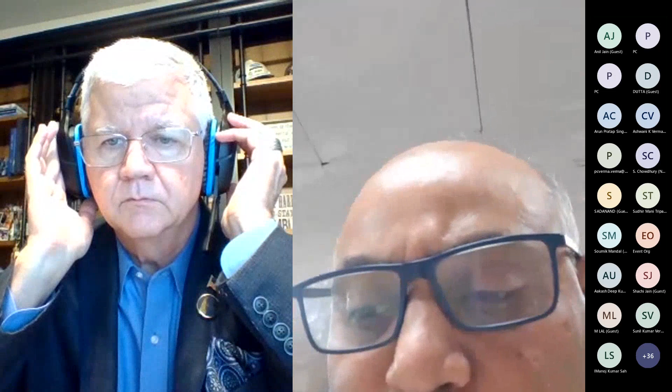Oh, that's a good question. Non-destructive test methods to follow during construction—that's a very large question about quality control during construction. The RCC Bulletin 177 has a chapter on quality control that you should follow during construction.